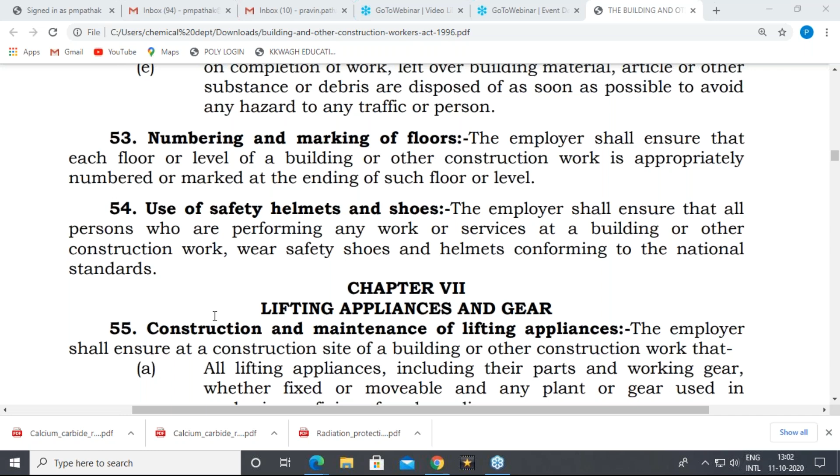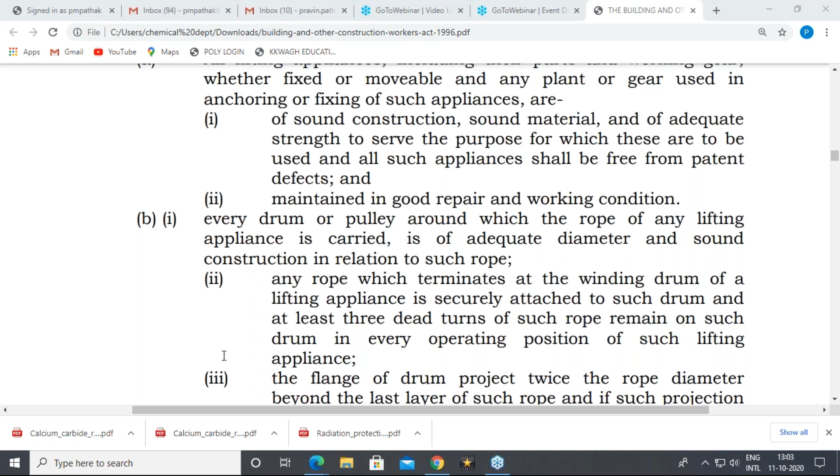So chapter 7 gives you the idea regarding lifting appliances and gear. Rule 55 covers construction and maintenance of lifting appliances. We have already discussed lifting of material, lifting of objects, and lifting of building workers. All these lifting activities are done with lifting appliances, and the maintenance of these lifting appliances must be done regularly. Whatever the parts of the lifting appliance, be it a drum, a pulley, a gear mechanism, a fencing facility, or a guarding facility, all these things should be taken care of by the employer.

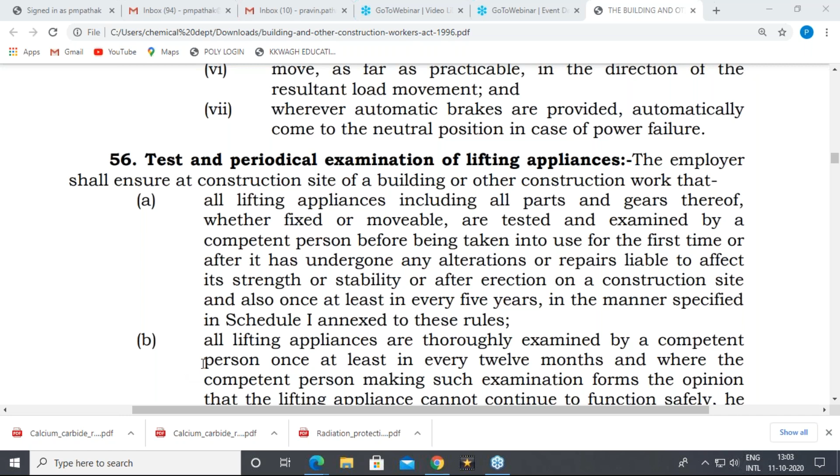Then 56 is regarding the test and periodical examination of lifting appliances. All these lifting appliances should be tested on a regular basis and examined periodically, and generally a competent person in this field should test and examine or inspect these lifting appliances every year, and the main test or examination should be done at least every 5 years.

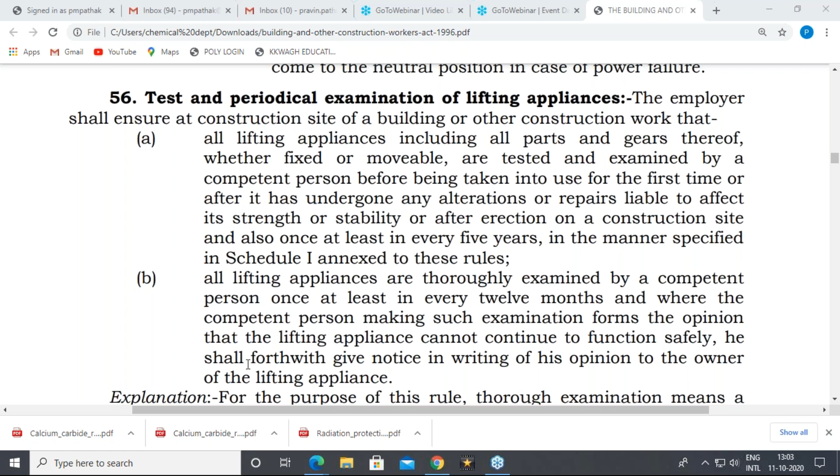Then automatic safe load indicators should also be mounted on these appliances at the construction site, because safe working load is the main parameter from which you can understand whether these appliances and equipment are conducting all the activities in a safe mode or not. So the automatic safe load indicator should be mounted on the mounting accessories, on the equipment, or on the control panel of that equipment.

Then installations: the employer shall ensure at a construction site of building or other construction work that fixed lifting appliances are installed by a competent person in a manner where the load is calculated, vibration is minimized, and other influences are minimized, so that the operator is not exposed to danger from loads, ropes, or drums, and so that the operator can either see over the zone of operation or communicate with all loading and unloading points by signal or other communication systems.

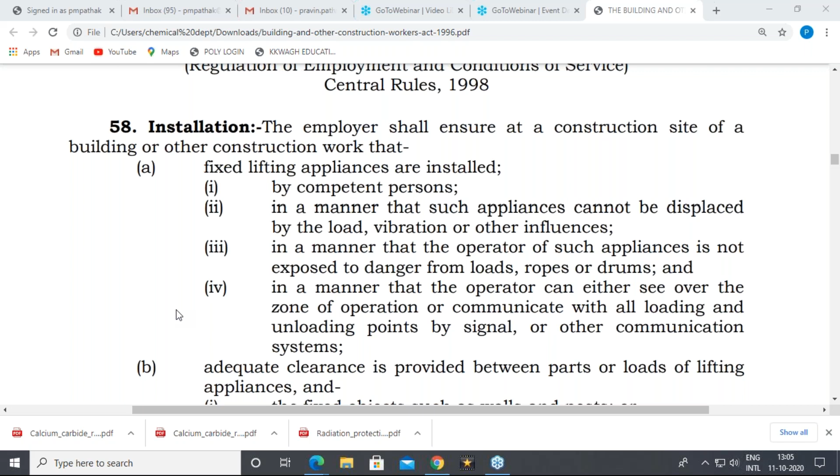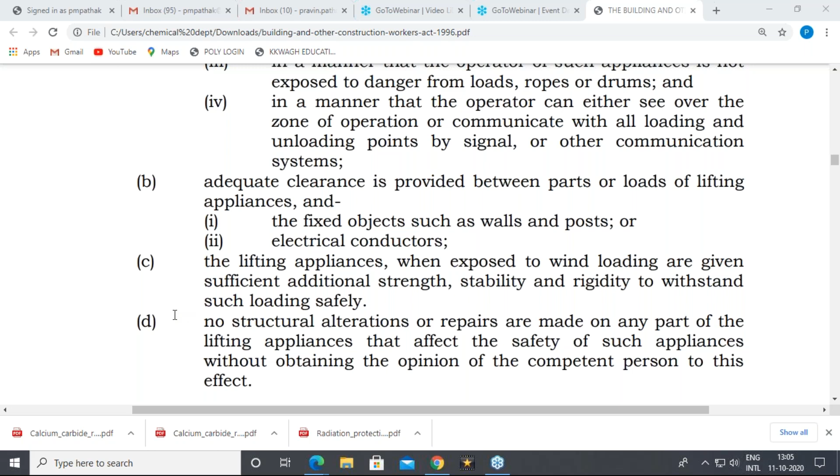So with the help of these reference points and guidelines, this installation should be done. There should be adequate clearance between these parts and loads and different appliances. Lifting appliances exposed to wind loading are given sufficient additional strength, stability, and rigidity to withstand such loading safely.

Then 59 is related to winches. The employer shall ensure at a construction site of building or other construction work that winches are not used if control levers operate with excessive friction or play. So if there is excessive friction, we have to avoid using these winches in construction activities. Double gear winches are not used unless a positive means of locking the gear shift is provided. There is no load other than the fall and the hook assembly on the winch.

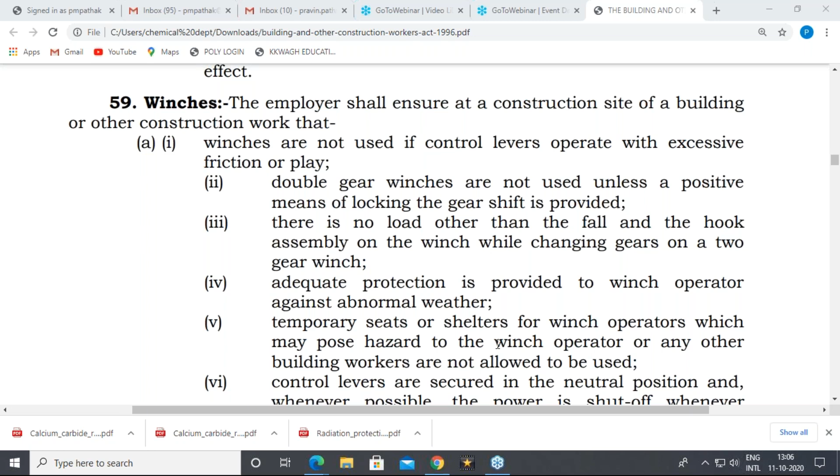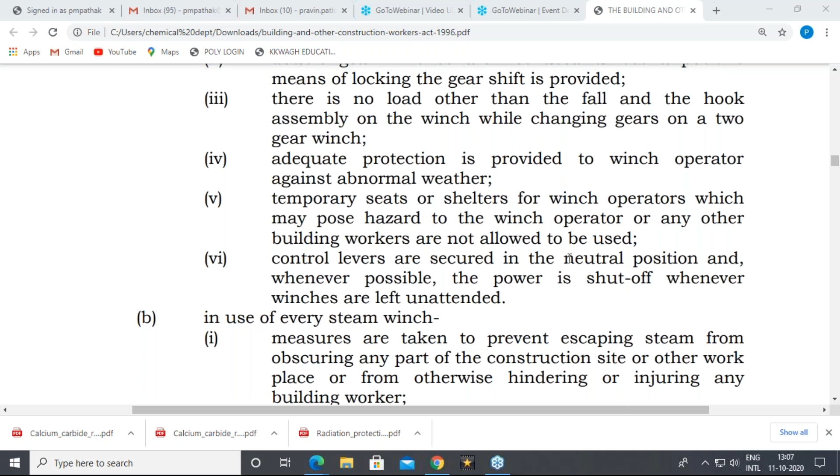While changing gears on a 2-gear winch, adequate protection is provided to the winch operator against abnormal weather; temporary seats or shelters for operators which may pose a hazard to the winch operator or other building workers are not allowed to be used. Control levers are secured in the neutral position and, whenever possible, the power is shut off whenever winches are left unattended. So take note: if you are not going to operate these winches, you have to shut off the winches whenever there is no requirement for operation.

In use of every steam winch, measures are taken to prevent escaping steam from obscuring any part of the construction site. Extension control levers which tend to fall of their own weight are counterbalanced. Winch operators are not permitted to use winch control extension levers except for short handles, and such levers are of adequate strength, secured and fastened with metal connections. So all these things should be noted: the connections, the strength of the winches, the lever, the arms, the connection with the metal strips or the fixed installation, etc.

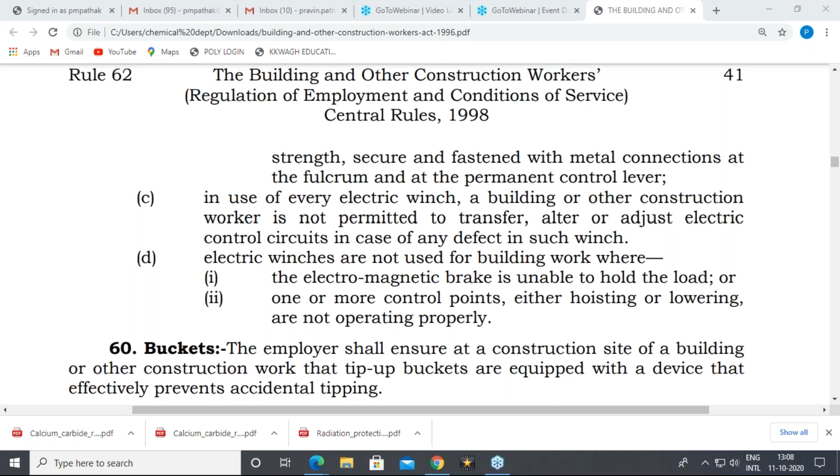So all this care should be taken by the winch operator, whether the winch is operated on the electrical basis or on the steam basis.

Then for buckets, the employer shall ensure at the construction site of a building or other construction work that tip-up buckets are equipped with a device that effectively prevents accidental tipping, so as to prevent the building worker from different types of accidents which may happen due to bucket movement.

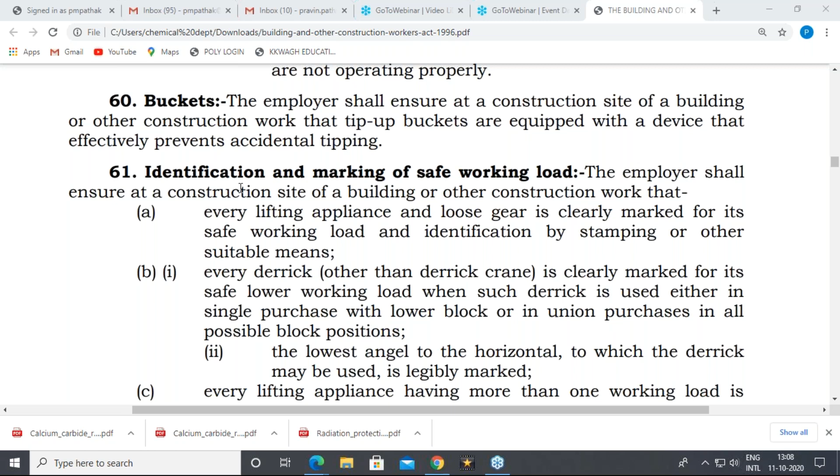Then identification and marking of safe working load should be done at the construction site wherever applicable.

Then loading of lifting appliances and lifting gears. All the guidelines given by the expert or competent person for handling these types of lifting appliances and gears should be followed by the building worker. That is the main key to prevent this type of accident.

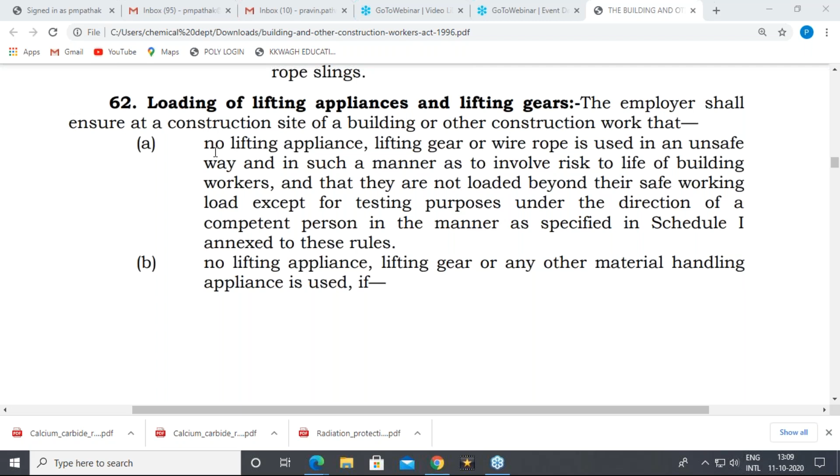Then the operator should observe and recall all the types of testing of the appliances and gear mechanism, and the examinations and certifications required. The inspector will take care of all these types of testing, examinations, and certifications, but the operator should also know which type of testing and which BIS standards or other standards are required for using these appliances and their mechanism.

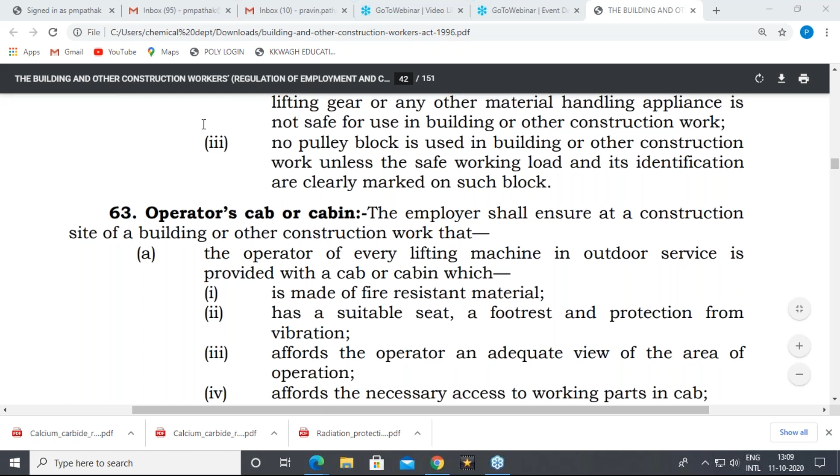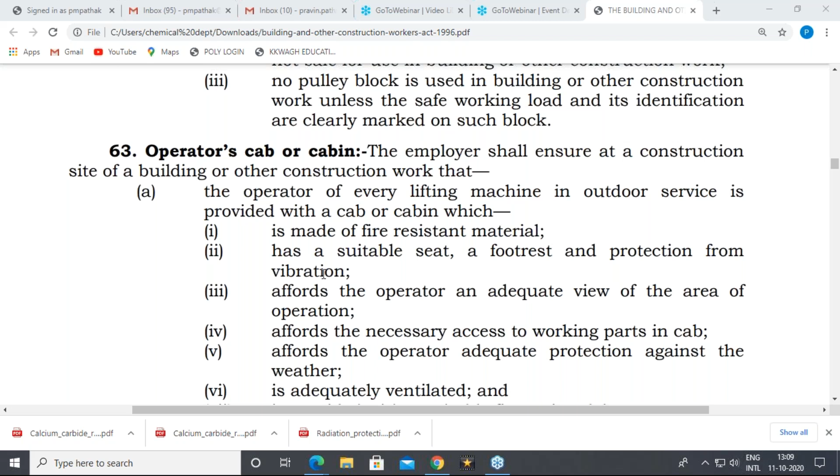Then, point related to the operator's cab or cabin: the operator of every lifting machine in outdoor service is provided with a cab or cabin made of fire resistant material, having a suitable seat, a footrest, and protection from vibration. It affords the operator an adequate view of the area of operation, which is essential, allows necessary access to working parts in the cab, gives adequate protection against weather, is adequately ventilated, and is provided with a suitable fire extinguisher. So fire extinguisher, fire resistant material, adequate ventilation, light systems, etc., all should be provided in the cabin or operator's cab.

Then operation of lifting appliances should be guided by the competent person, and all operators should go through different types of training where their skills can be tested and upgraded, to prevent any type of accident these trainings are essential.

So 18 plus years is the criteria for using these types of appliances or scaffolding. A trained operator should observe initially when a new operator joins and starts handling these types of lifting appliances.

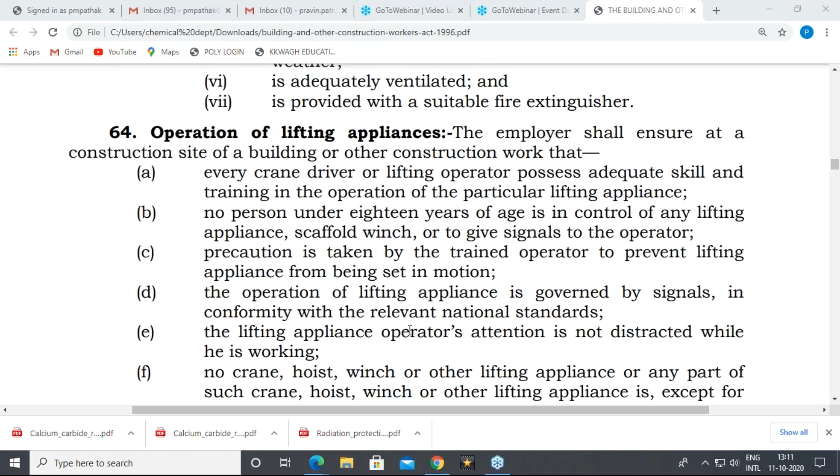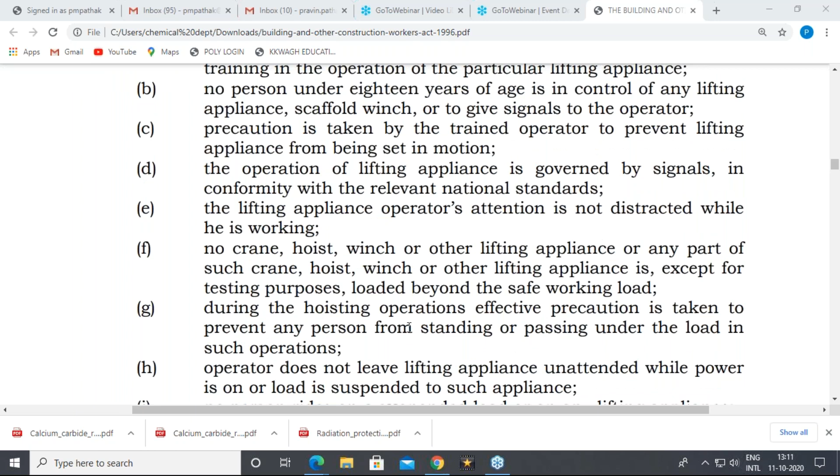The operator's attention should not be distracted while working. That is why equipment like mobile phones should also be avoided while operating these types of appliances.

No crane, hoist, winch, or other lifting appliance, or any part of such, is loaded beyond the safe working load except for testing purposes. So you should know exactly what the safe working load of that lifting appliance is.

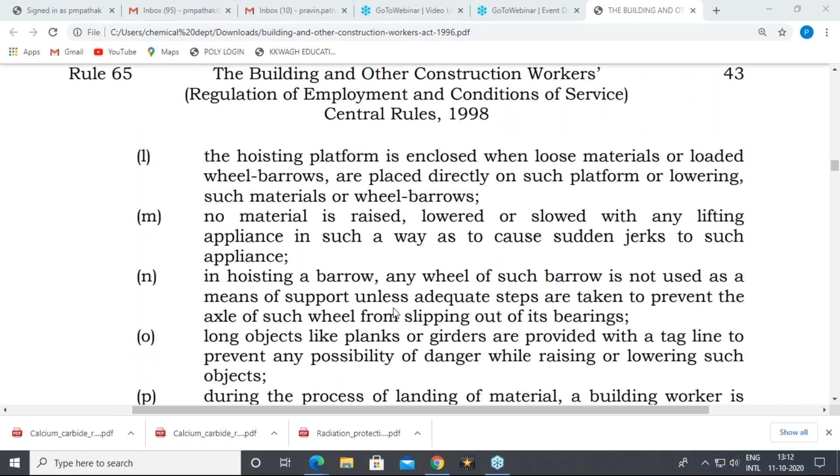So all precautionary measures should be taken by the operators who are operating these types of lifting appliances. There may be a platform raised, lowered, or slowed with a lifting appliance, and that may cause sudden jerks, which should be avoided.

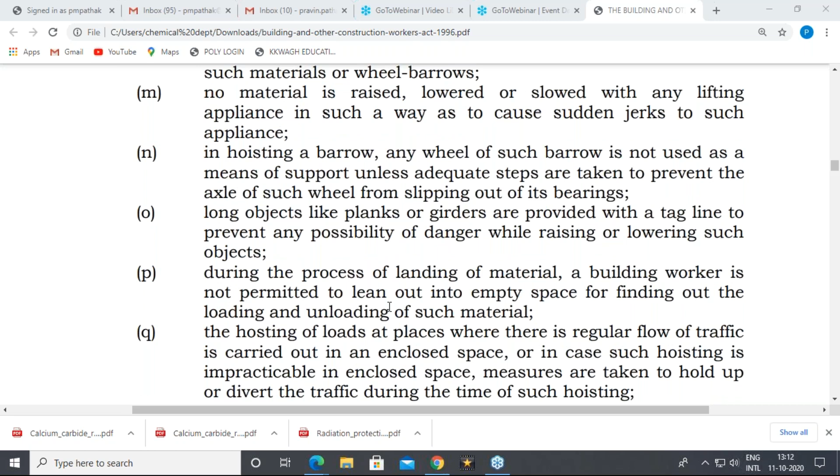Then, for hoisting a barrow, any wheel of such barrow is not used as a means of support unless adequate steps are taken to prevent the axle of such wheel from slipping out of its bearings.

So long objects like planks or girders are provided with a tagline to prevent any possibility of danger while raising or lowering such objects, because these objects are very heavy. Due to this, there are chances of fatalities and severe injury to the head, which is why these precautionary measures should be taken at the construction site.

Then, hoist: the employer shall ensure at a construction site that hoist towers are designed according to the relevant national standards.

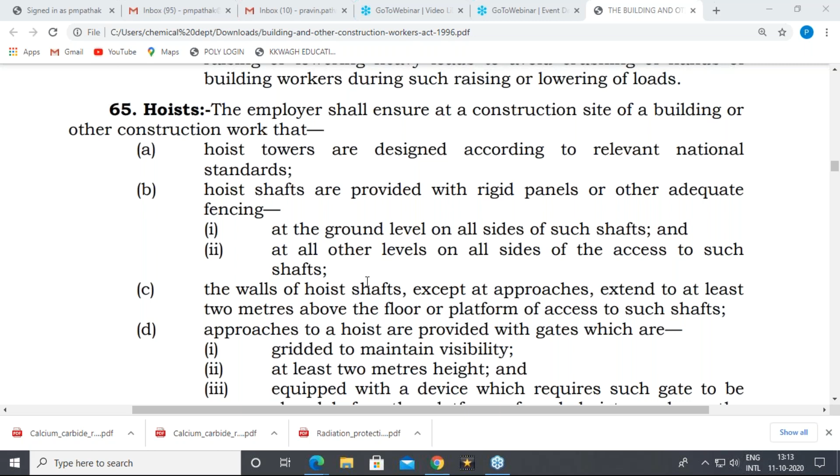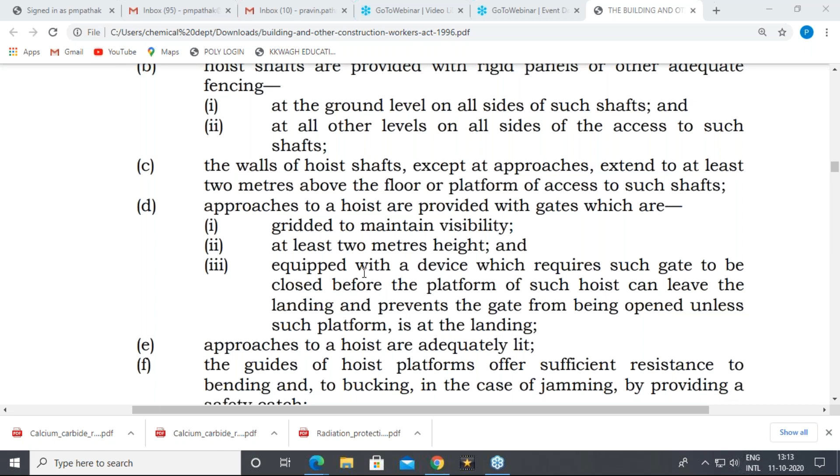Hoist shafts are provided with rigid panels or adequate fencing. The walls of hoist shafts, except at approaches, extend to at least 2 meters above the floor or platform of access to such shafts. Approaches to a hoist are provided with gates which are gridded to maintain visibility, at least 2 meters in height, equipped with a device which requires such gates to be closed before the platform of the hoist can leave the landing, and which prevents the gate from being opened unless the platform is at the landing. So gates should be provided with proper control, equipped with the hoist, and at least 2 meters is the main criteria for handling these types of hoists.

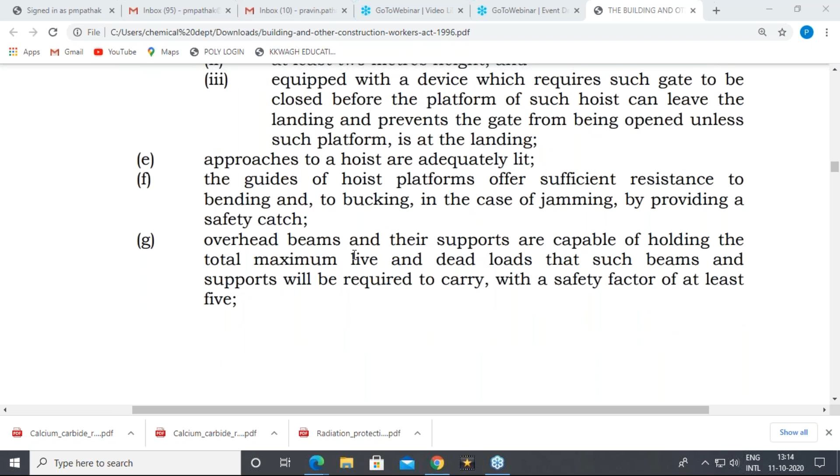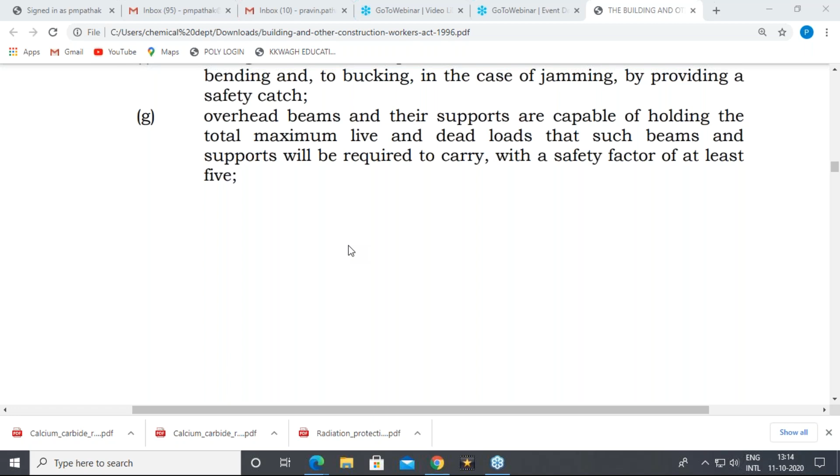The platform should be strengthened to remain strong in case of jamming, by providing safety catches, and guides are provided for this hoist platform. Overhead beams and supports are capable of holding the total maximum live and dead loads, such beams and supports being required to carry a safety factor of at least 5, and a clear space is provided for moving, stopping, and all other activities done by this hoist.

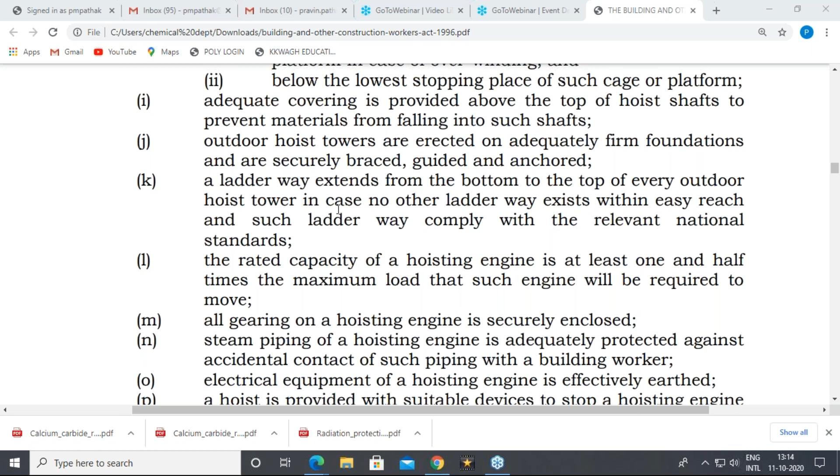So the ladder way extends from the bottom to the top. Every outdoor hoist tower, in case no other ladder way exists within easy reach, such ladder way should comply with the relevant national standards. So all these platforms, safety work operations, and controls should be decided by complying with the relevant national standards.

So all these guidelines are given in these sub rules for the hoist operations.

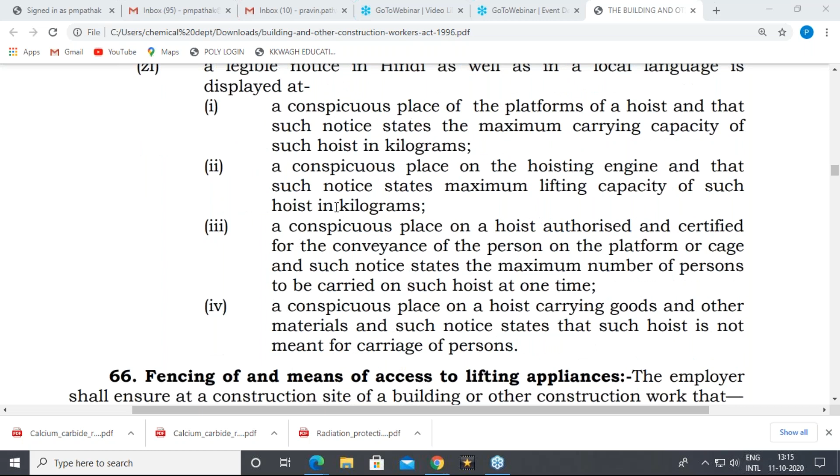Then fencing of and means of access to the lifting appliances. We have already discussed the parts of the lifting appliances, that may be a pulley, a gear mechanism, or a revolving part. So all these parts should be fenced to avoid accidents.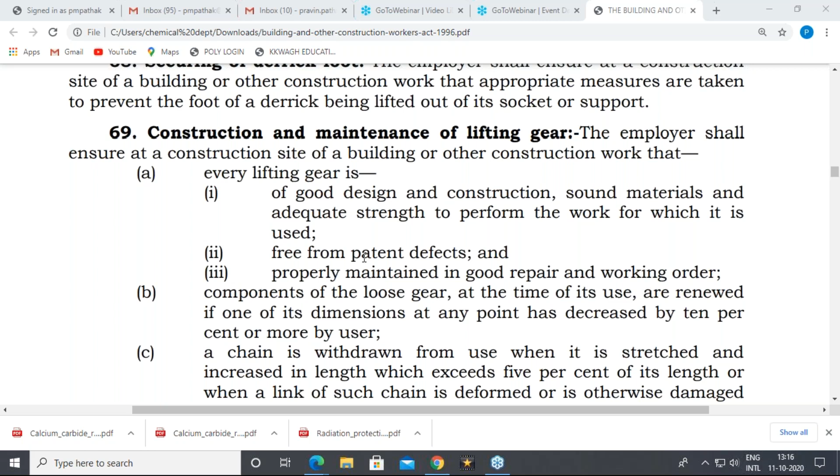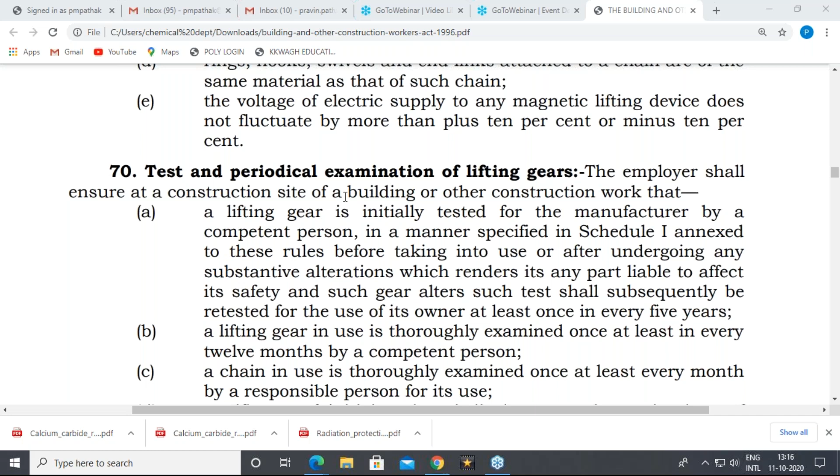Then rule 68 is regarding the securing of derrick foot, and rule 69 regarding the construction and maintenance of lifting gear. We have already discussed that lifting gear mechanisms and lifting appliances should be taken care of by the competent person, the inspector, and the operator for regular maintenance and repairing. Testing and periodical examination of this lifting gear should be done by the competent person, who will check the lifting gear mechanism every 12 months as a minimum criteria.

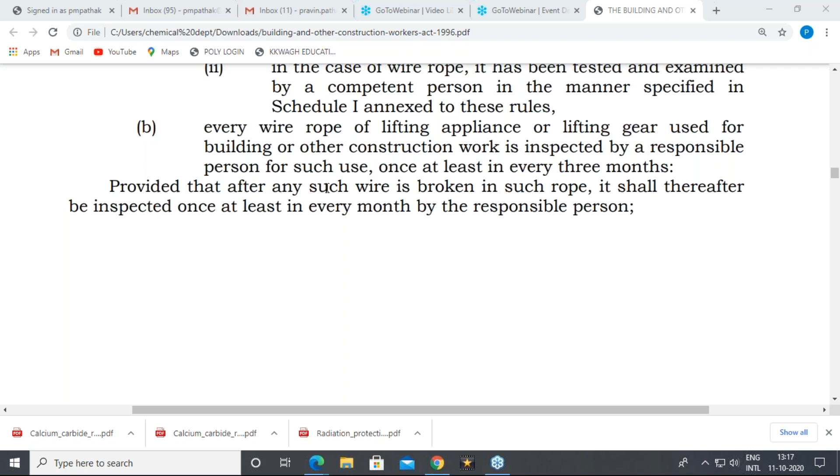Then rule 71 is related to ropes. No rope is used for building or other construction work unless it is of good quality and free from patent defects. In the case of wire rope, it must have been tested and examined by the competent person with reference to Schedule 1 annexed to these rules. So every wire rope of a lifting appliance or lifting gear used for building or other construction work is inspected by a responsible person every 3 months. All these ropes should be tested or examined by an expert person.

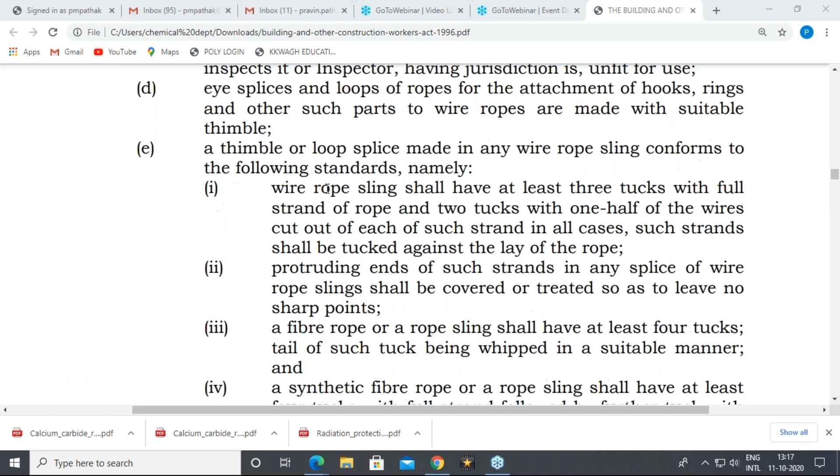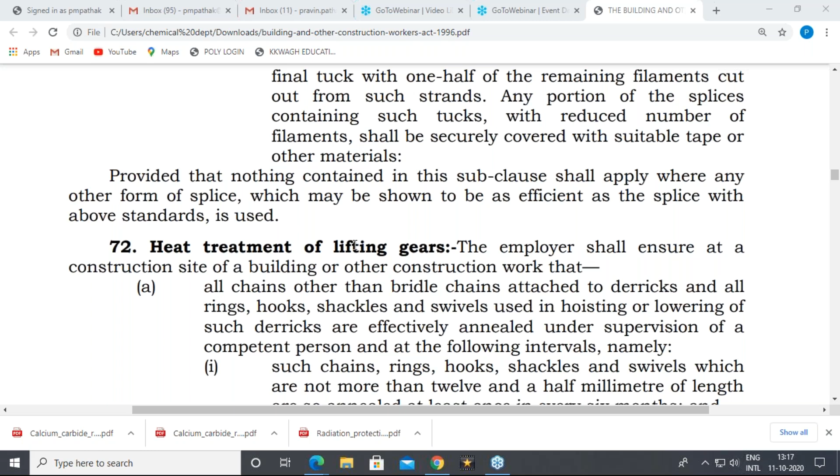So all the guidelines while selecting these types of ropes are given, like for fiber rope, rope sling, synthetic fibers, etc. There are different varieties of ropes available in the market, and before selecting these types of rope, we must study the actual operational procedures. So to avoid accidents, we must go for the appropriate rope.

Then rule 72 is related to the heat treatment of lifting gears. These lifting gears require some heat treatment for better strength and better resistance for handling different types of activities at the site.

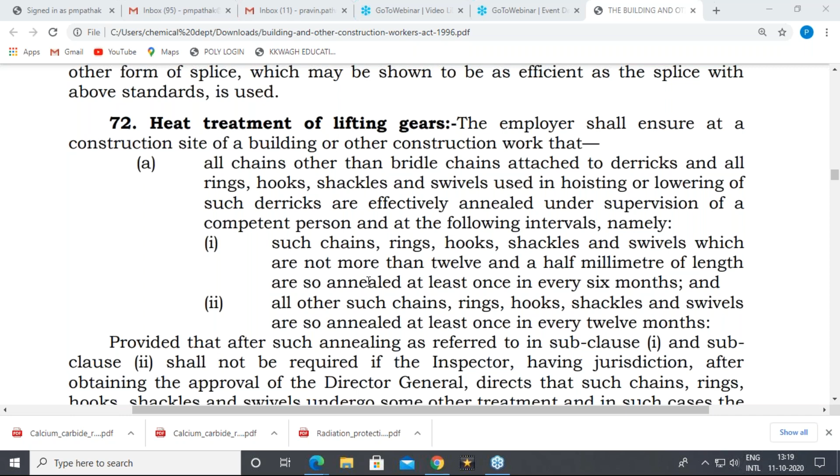So the competent person will supervise these different parts, that may be rings, hooks, shackles, swivels, hoisting parts, etc. Supervision of the competent person applies for such chains, rings, hooks, shackles and swivels which are not more than 12.5 millimeters in size, annealed at least once every 6 months. Annealing is one of the heat treatment processes required for these types of parts - chains, rings, hooks, shackles, etc. - once every 6 months for this criteria. All other such chains, rings, hooks, shackles and swivels are annealed at least once every 12 months. So depending on the size, the annealing process or heat treatment process required differs.

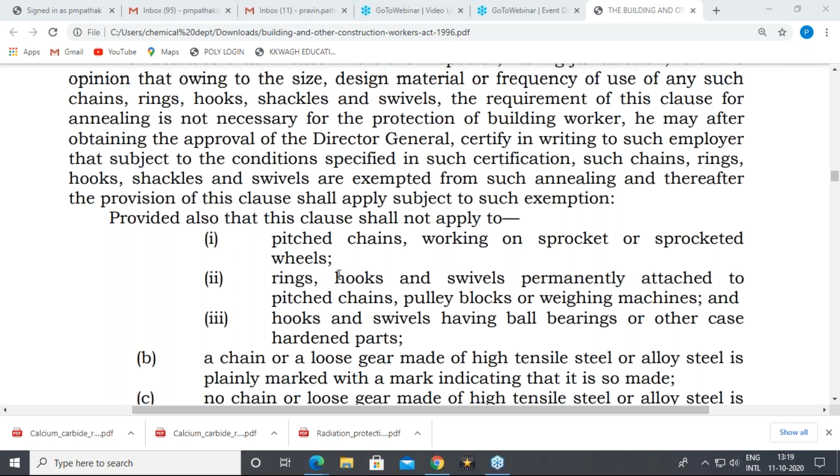There are different guidelines for the heat treatment, given by the Director General, inspectors, and competent persons for different parts of these appliances.

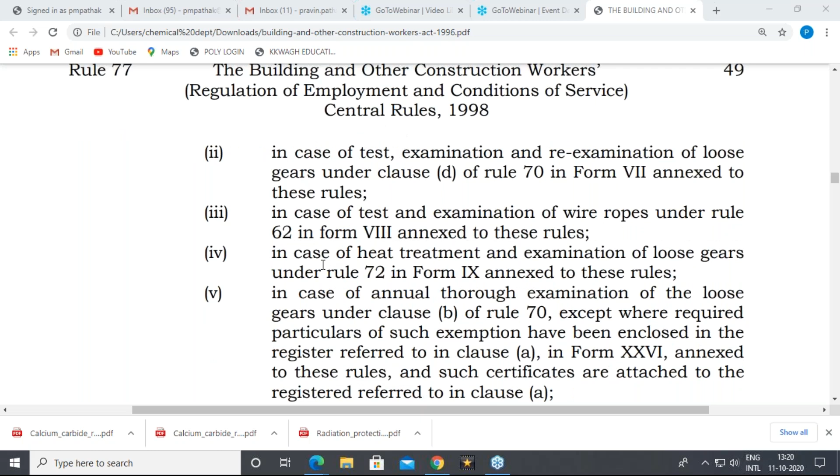Then there is a certificate process to be issued after actual testing and examination by the competent person, mentioned under rule number 73. Then the register of periodical tests, examinations and certificates, or the record keeping of this certification, is mentioned under rule number 74. So whatever requirements are given under the above rules, in the different forms or schedules, all this should be recorded in that register.

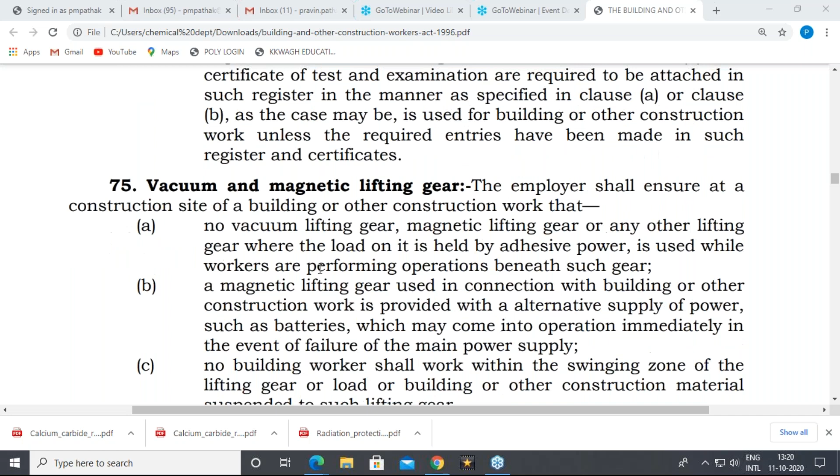Then rule number 75 is related to vacuum and magnetic lifting gear. The employer shall ensure that no vacuum lifting gear, magnetic lifting gear, or any other lifting gear where the load is held by adhesive power, is used while workers are performing operations beneath such gear. A magnetic lifting gear used in connection with building or other construction work is provided with an alternative supply of power.

So it is an alternative supply of power, such as batteries, which may come into operation immediately in the event of failure of the main power. So it is an additional arrangement - magnetic power can be used when the main power fails.

Rule 76 is related to the knotting of chains and wire ropes. The guidelines state that no chain or wire rope with a knot in it is used in building and other construction works. So it is restricted that knotting of chains and wire ropes should be avoided.

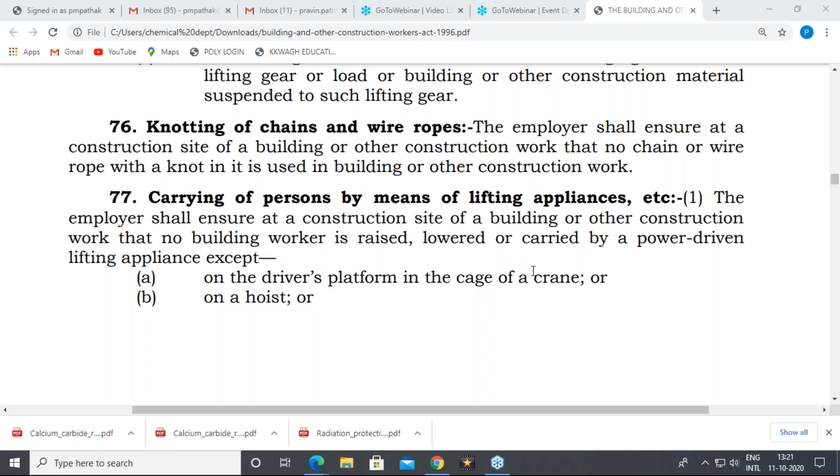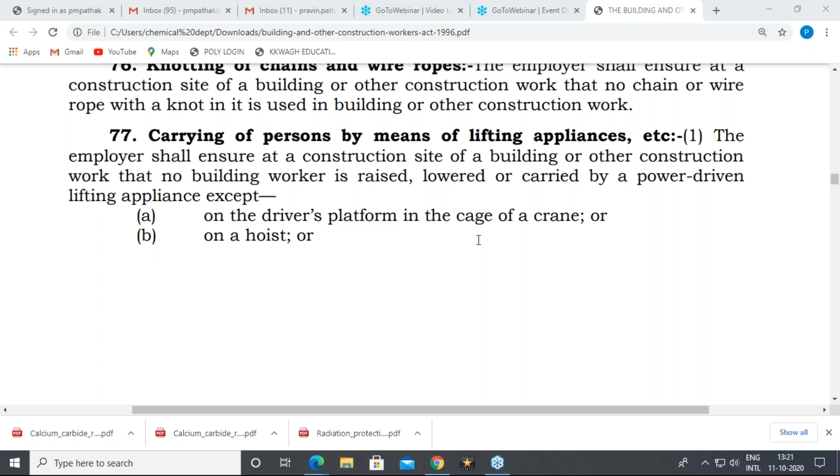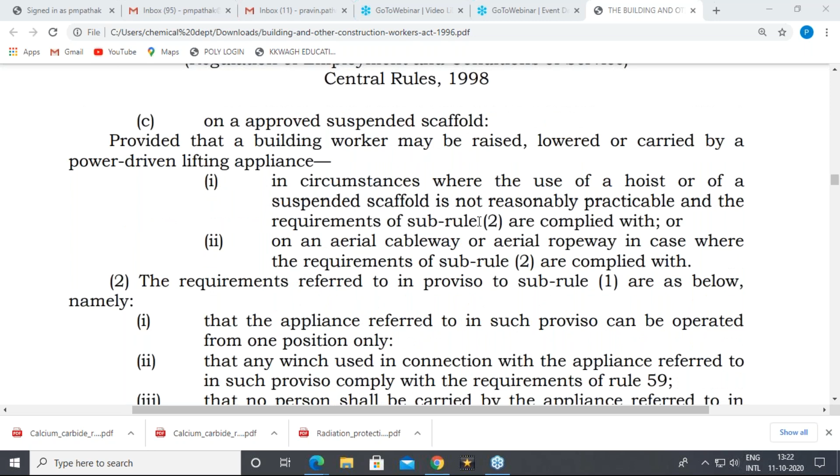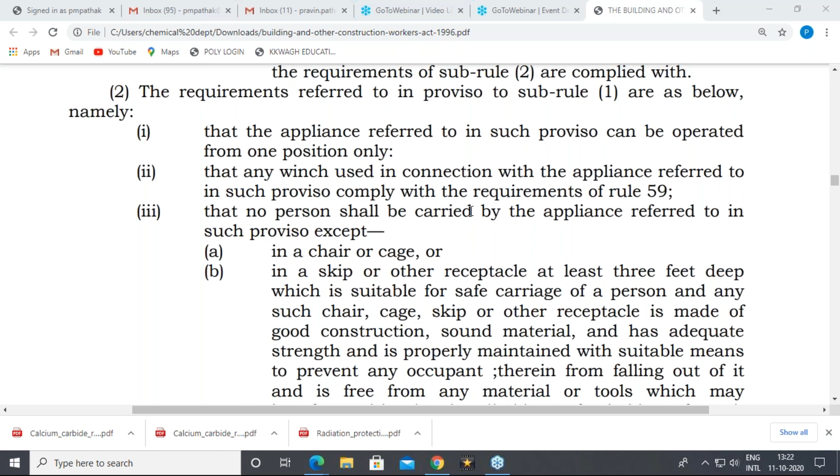Rule 77 is related to the carrying of persons by means of lifting appliances. We have already discussed that lifting appliances can be used to lift objects, materials, and persons. This is related to persons now. Power driven lifting appliances can be used for this purpose, except on the driver's platform, in the cage of a crane, on a hoist, or on an approved suspended scaffold. These can be used to lift persons depending on the capacity of the lifting appliances and the height at which persons are carried. There should be arrangements for ventilation, lighting, and chair or cage arrangements, etc.

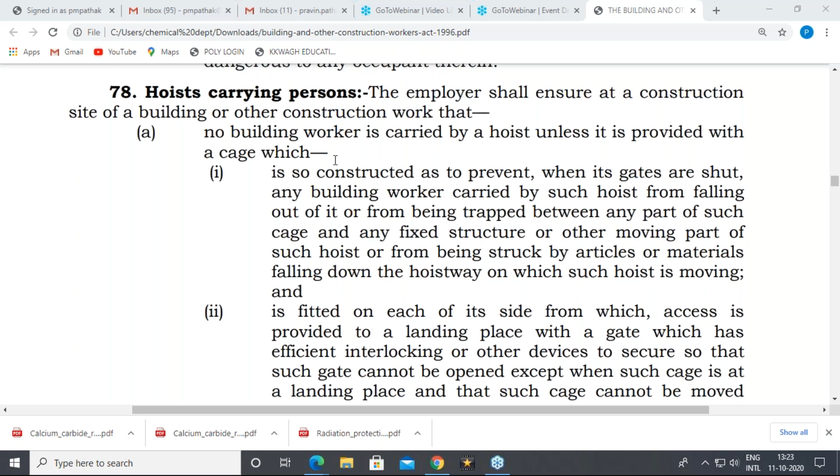Rule 78 is related to hoists carrying persons. The employer shall ensure this facility at the site. No building worker is carried by a hoist unless it is provided with a cage. Normally, lifting appliances are used to carry persons. In case of an emergency or exceptional situation, hoists are used to carry persons, but the condition is that a cage must be provided to that hoist, and only then can these persons be carried.

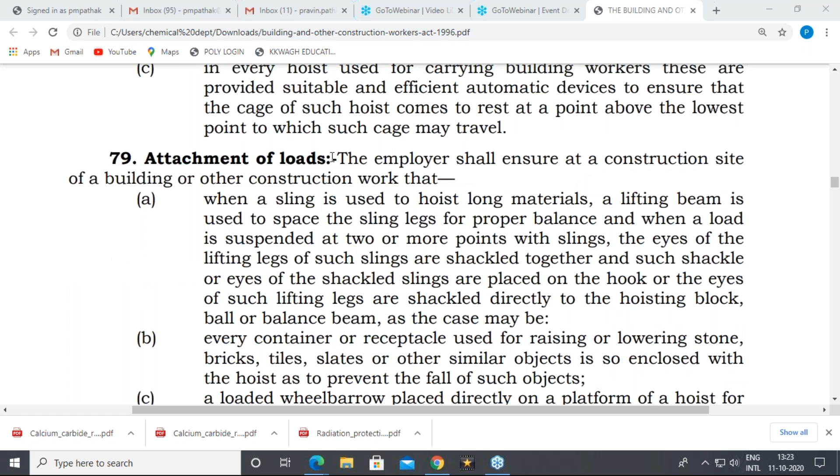Rule 79 is related to the attachment of loads. We have already discussed lifting appliances for carrying materials. We have to check the safe load factor, the lifting capacity, and the conditions of the slings or ropes used for lifting materials, whether tests and examinations are carried out and up to date, whether certificates are available for these tests and examinations, and whether competent persons have tested, examined, or inspected all these parts of attachments, whether rope, sling, or other parts.

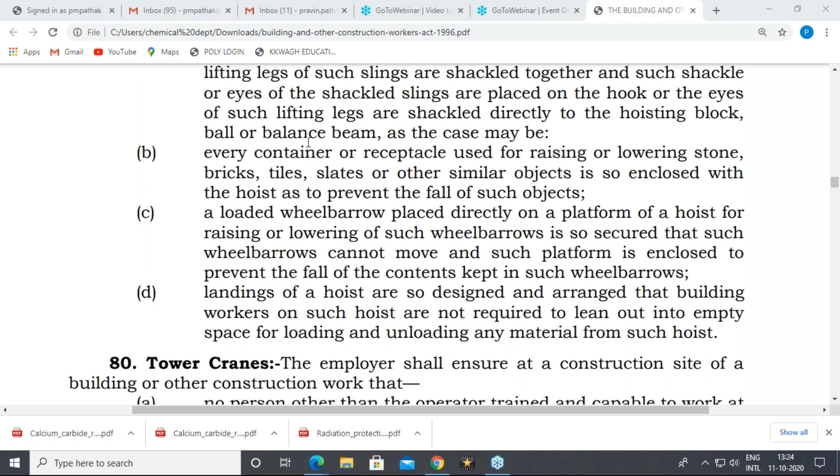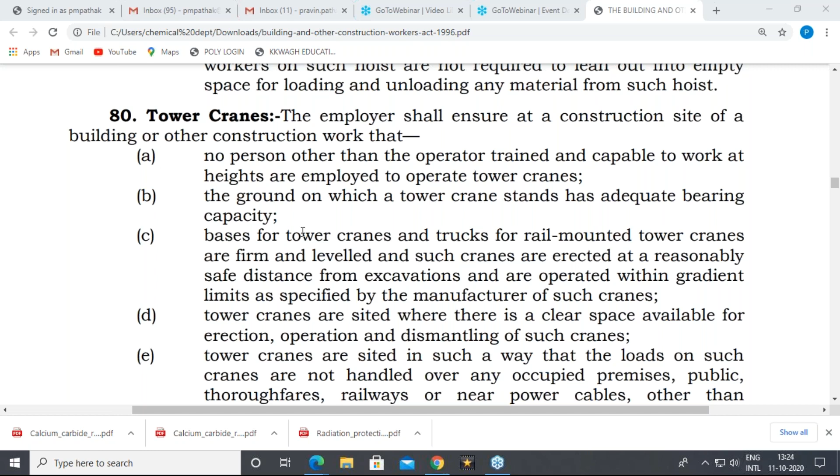Rule 80 is related to tower cranes. No person other than an operator trained and capable to work at heights is employed to operate tower cranes. These tower cranes require separate training for operation, which is why only trained persons are involved. Some standards are followed for deciding the capacity of the tower crane, the base plate, the base mechanism, the strength of the base, and the carrying capacity, all of which should be tested and examined by a competent person.

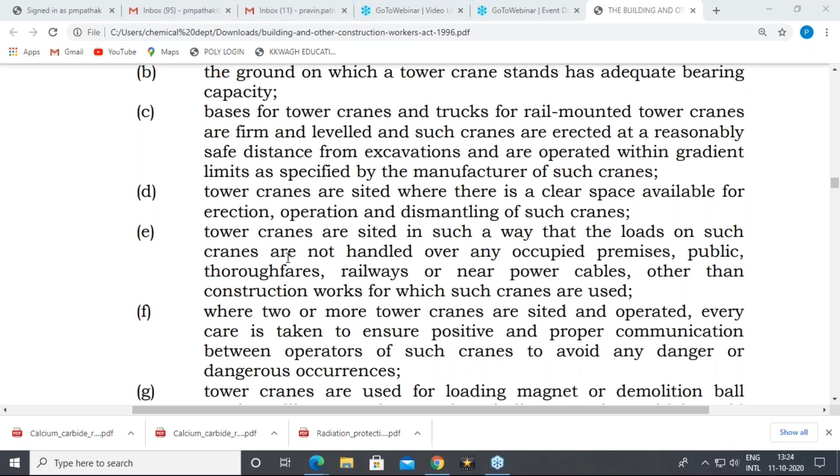Rule 81 is related to the qualification of operators of lifting winches and of signalers. For lifting winches and signaling, the operator's qualification requires being above 18 years of age, sufficiently competent and reliable, possessing knowledge of the inherent risks involved in operating lifting appliances, and being medically examined periodically as specified in Schedule 7 annexed to these rules. We have to read Schedule 7 for the details of these operator qualifications.

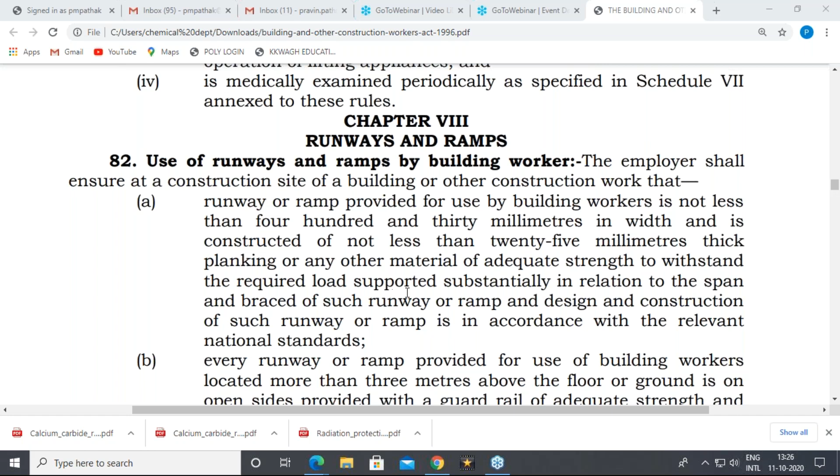Chapter 8 focuses on runways and ramps. Rule 82 is related to the use of runways and ramps by building workers. In emergency planning or an emergency action plan, due to natural calamities or similar conditions, runways and ramps can be designed for moving building workers from one place to another. For this purpose, the thickness, width, and material of construction of these runways and ramps, as well as the safe load factor, should all be taken care of while designing them.

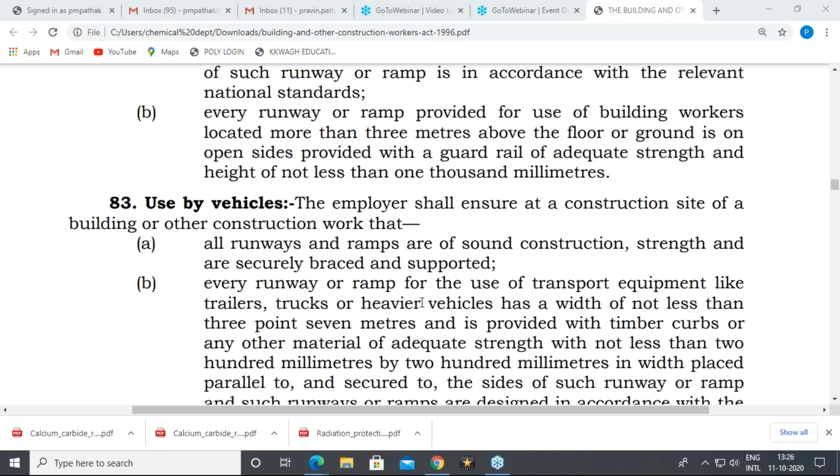Rule 83 is related to use by vehicles. All runways and ramps are of sound construction and strength, and securely braced and supported. Every runway or ramp for use by transport equipment like trailers, trucks, or heavier vehicles must have a width of not less than 3.7 meters, and must be provided with timber curbs or other material of adequate strength, not less than 200 millimeters by 200 millimeters in width, placed parallel to and secured to the sides of such runway or ramp. This provides a transportation facility so vehicles can move from one place to another with the help of these strong runways and ramps.

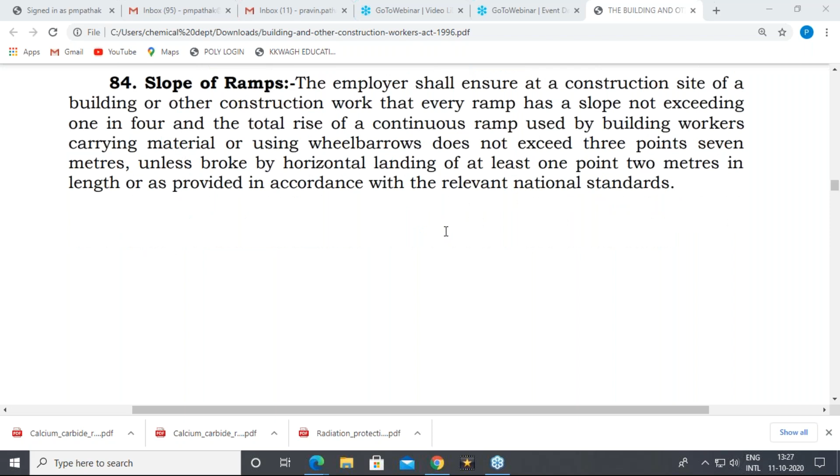There is also a condition that the slope of ramps should be as provided and mentioned by the competent person only. Rule 85 is related to the use by wheelbarrows.

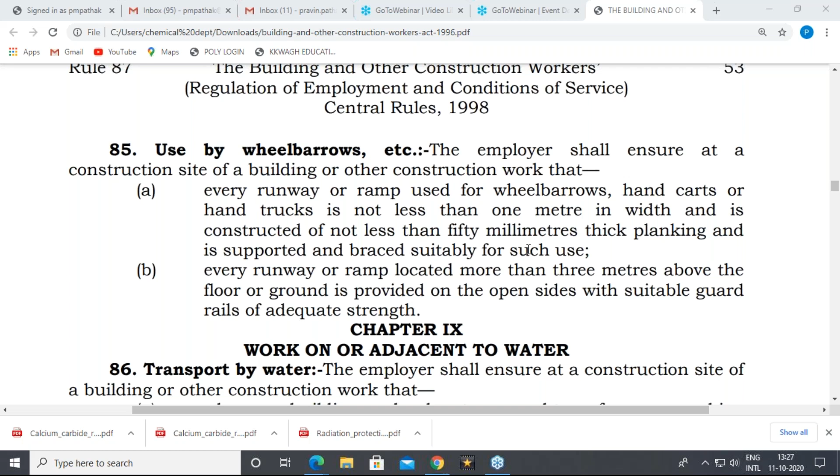Chapter 9 focuses on work on or adjacent to water. When construction activities are going on near water bodies or water sources, the precautions to be taken are mentioned under this chapter. Transport by water is one such activity near water. When any building worker has to proceed to or from any workplace by water for the purpose of carrying on building or other construction work, proper measures must be taken while transporting through this water.

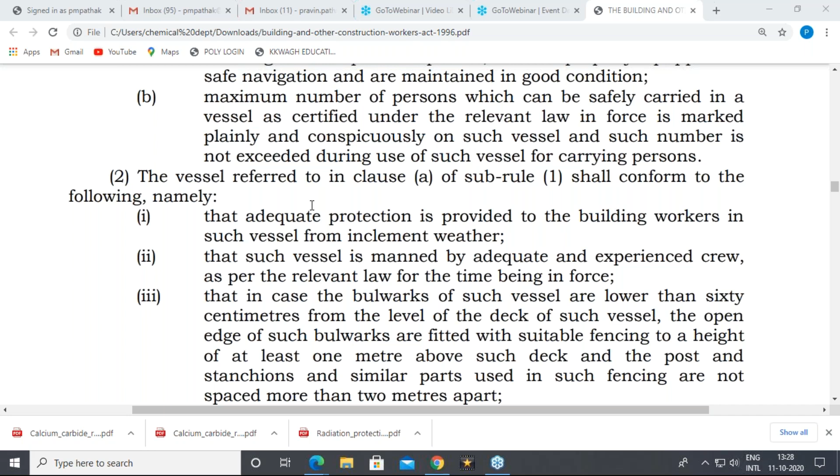So the maximum number of persons which can be safely carried should be identified, and only these number of persons should be allowed to go through the water with the transport facility. The vessel referred in the clause mainly ensures that adequate protection is provided for these vessels.

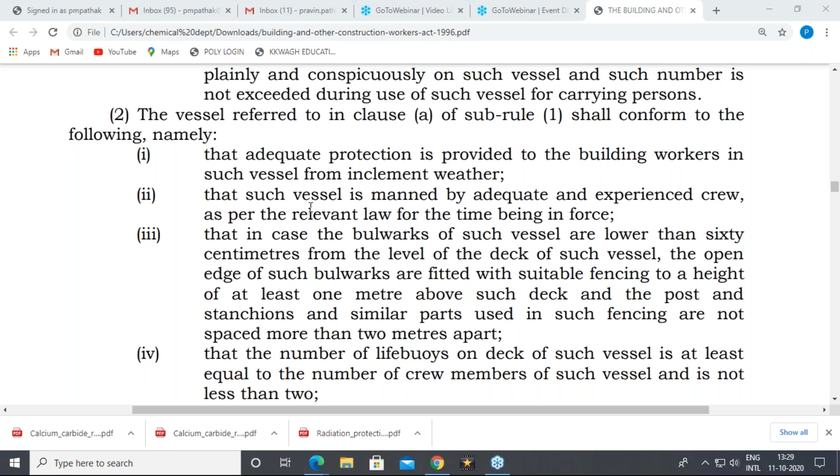Such vessels are manned by adequate and experienced crew as per the relevant law. In case the bulwarks of such vessels are lower than 60 centimeters from the level of the deck of such vessel, the open edge of such bulwarks are fitted with suitable fencing.

So we have to take care about this fencing, and the different dimensions mentioned in these rules. Also, the number of life buoys on deck of such vessel should be at least equal to the number of crew members, so that is not less than 2.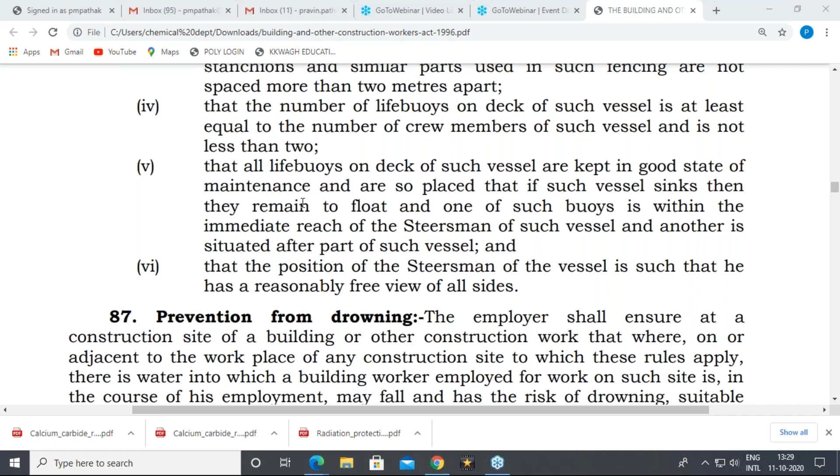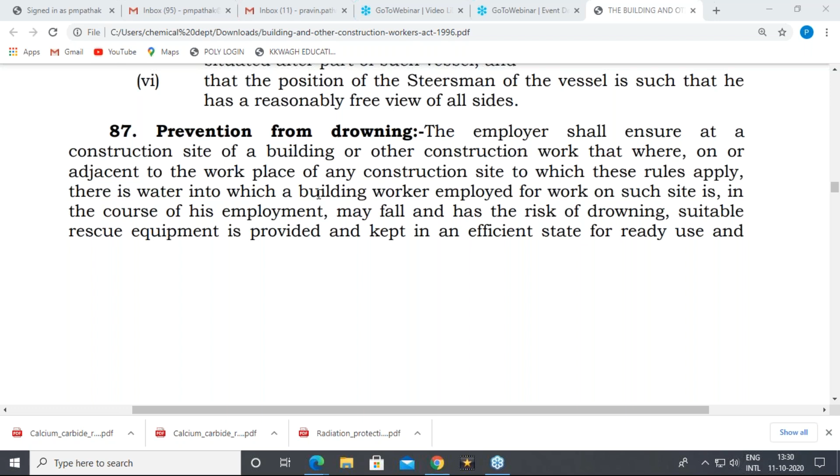Then rule 87 is related to prevention from drowning. Drowning is one of the main risks when construction activities are near water. To prevent these types of accidents, we have to take care by providing suitable rescue equipment in or nearby that construction activity.

Then chapter 10 focuses on transport and earth moving equipments. We have already discussed in detail about these earth moving equipments, their hazards, and their safety or precautionary measures in one of the sessions on construction activity equipments. Rule number 88 is related to earth moving equipment and vehicles, which we have already discussed.

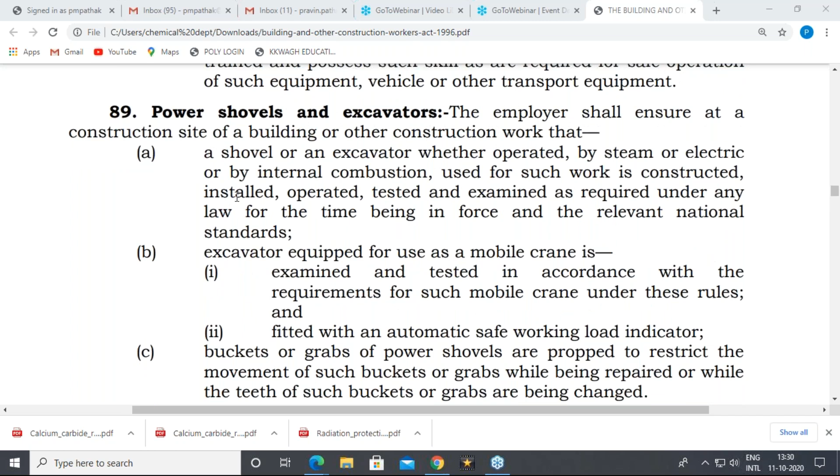Then power shovels and excavators are different equipments used in excavation work. Then bulldozers, their operating conditions and precautionary measures; scrapers, their operating conditions and safety measures; mobile asphalt layers and finishers. Especially you have to take care about this heated asphalt, that is hydrocarbon.

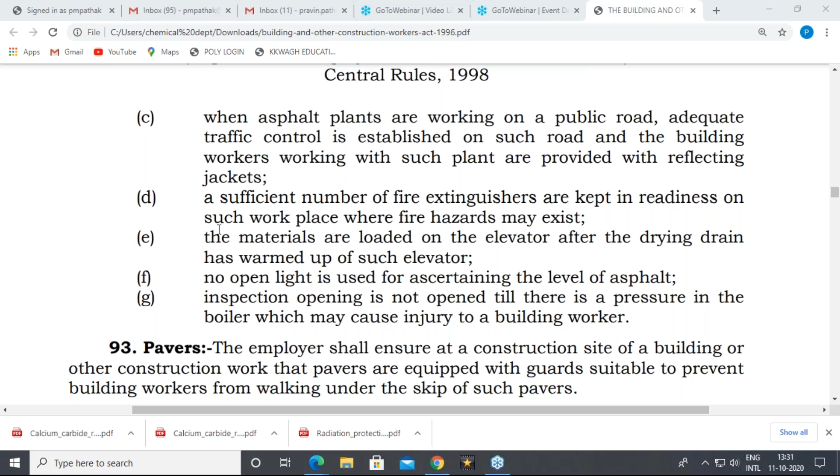That may be a dangerous chemical when you are going to handle it at higher temperature, and that is why gum boots, hand gloves, helmets, goggles, etc. should be provided while handling these types of chemicals.

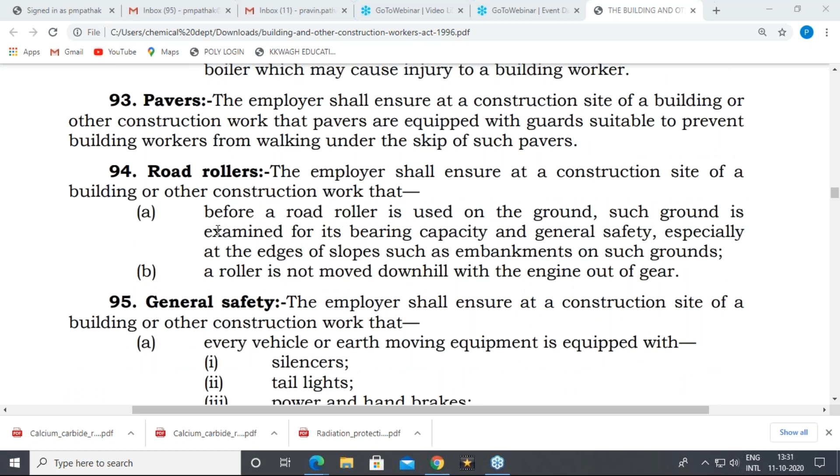Then pavers, road rollers, and rule number 95 is regarding general safety. Every vehicle or earth moving equipment is equipped with silencers, tail lights, power and hand brakes, reversing alarms, and searchlights for forward and backward movement, which are equipped for safe operation of such vehicles or earth moving equipments.

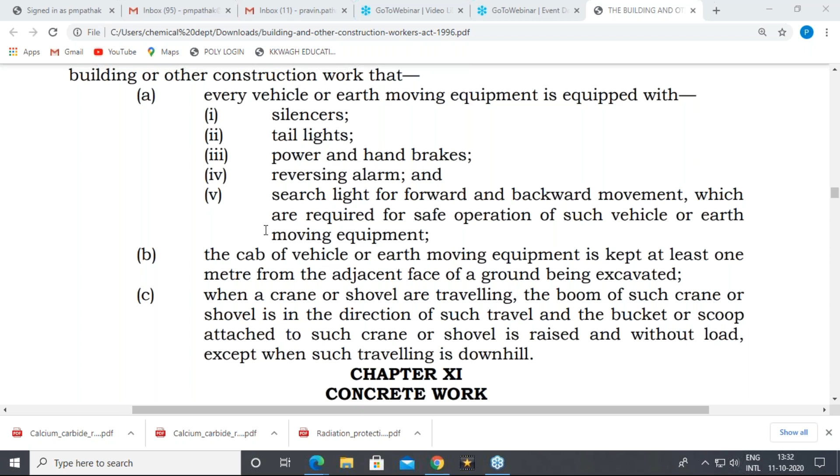So all these are the simple guidelines for each and every type of earth moving equipment. A cab with all the provisions like lighting, ventilation, etc. should be provided for doing the activities when we are handling the earth moving equipments or excavator equipments.

Then chapter 11 focuses on concrete work. Since we are talking about construction activity, this concrete work is also important. Rule number 96 is related to the general provisions regarding the use of concrete.

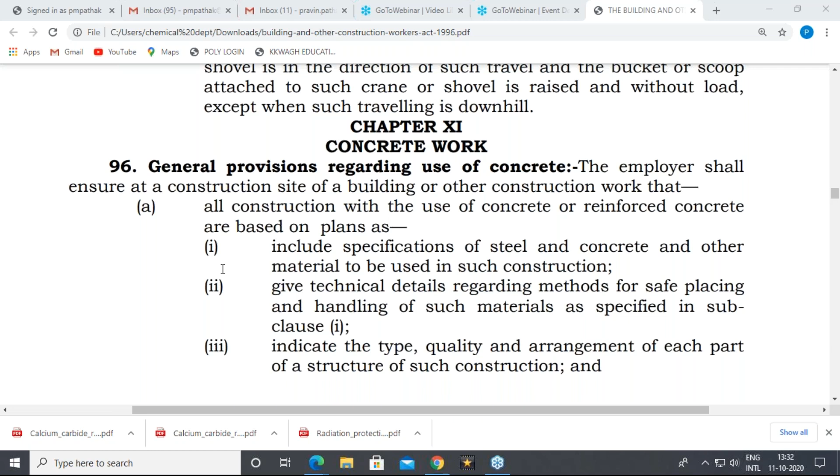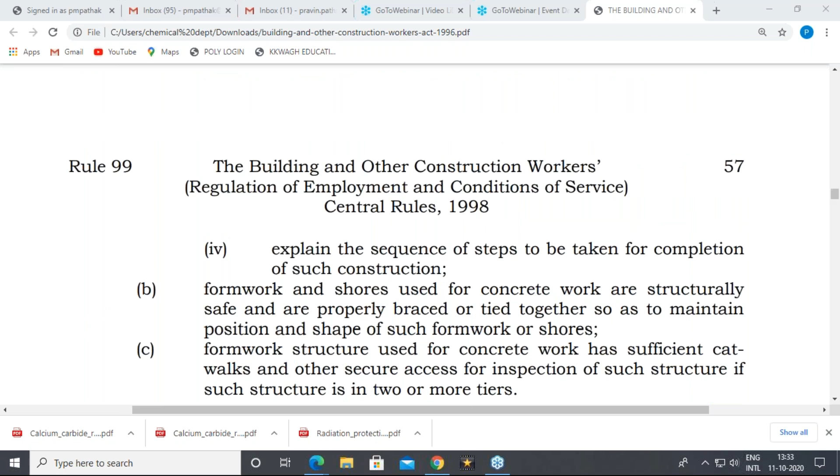So all construction with the use of concrete or reinforced concrete should be based on plans that include specifications of steel, concrete and other materials to be used in such construction; give technical details regarding the methods for safe placing and handling of such materials; indicate the type, quality and arrangement of each part of the structure of such construction; and explain the sequence of steps to be taken for completion of such constructions. We have to follow the standard procedures or standard sequence while handling these types of concrete or reinforced concrete.

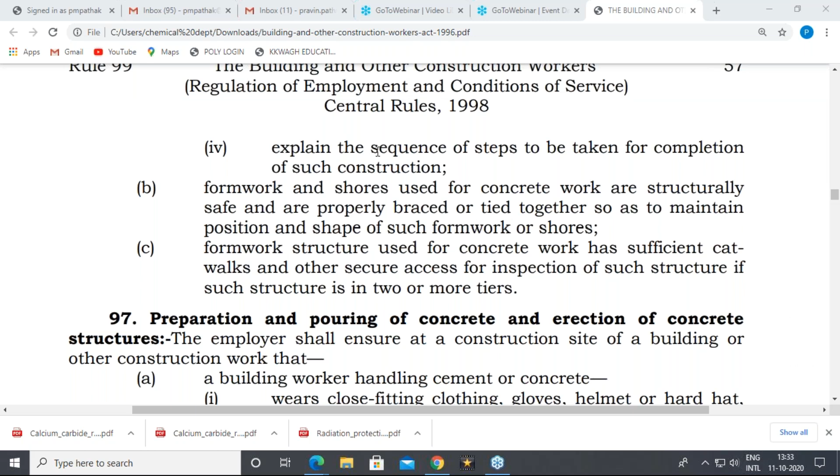Then rule number 97 is related to the preparation and pouring of this concrete and erection of concrete structures. While doing these activities, while pouring this concrete or erecting structures,

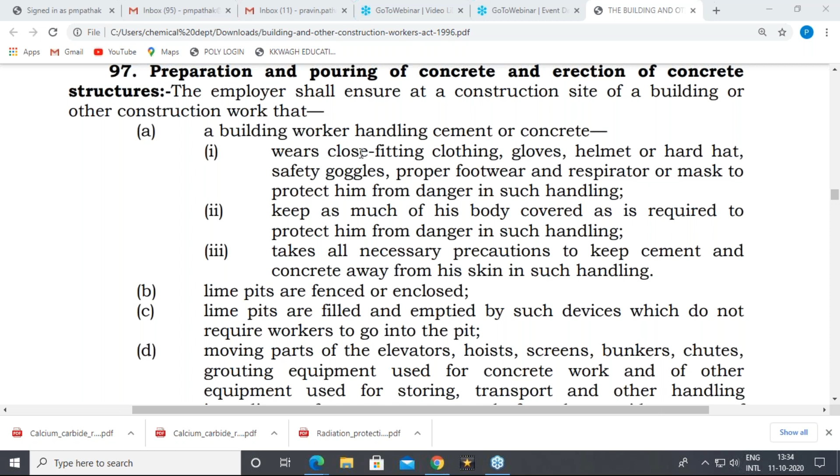we must use gloves, clothing, helmets, hard hats, safety goggles, proper footwear, and a respirator or mask to protect from the danger in such handling of these concretes. Keep as much of the body covered as is required to protect from the danger in such handling.

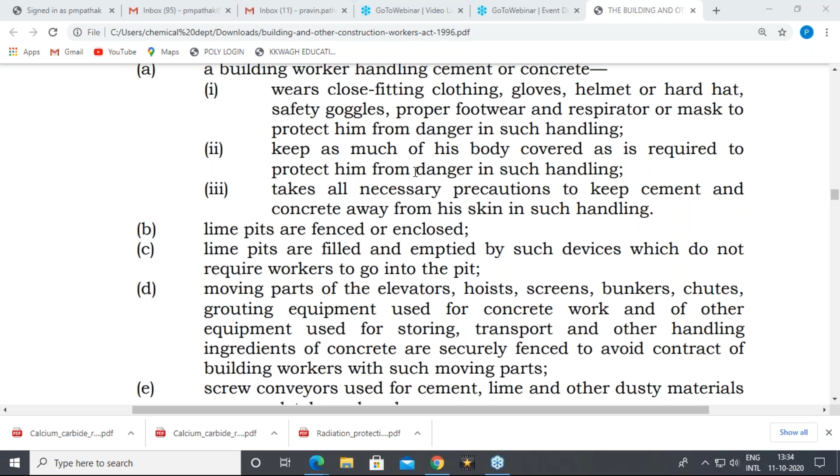So all the facilities or personal protective equipment should be provided to all the building workers while handling these types of concretes or other chemicals.

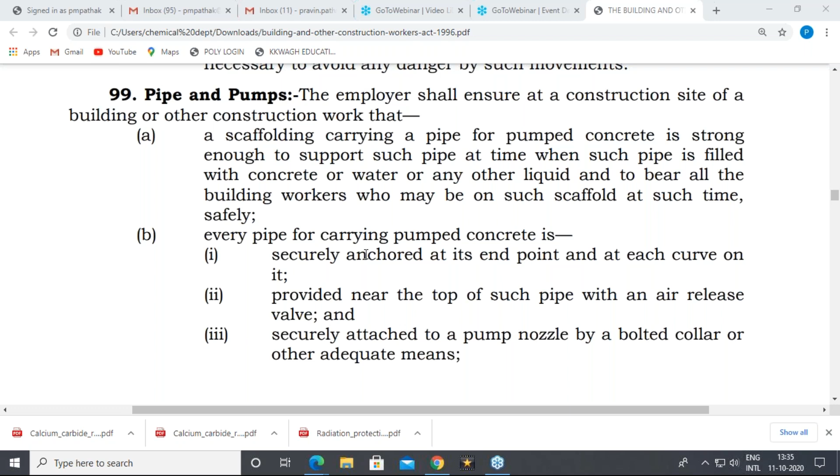Then rule number 99 is related to pipes and pumps. Some pipes carry the concrete, called semi-solid concrete, and it is driven by pumps. So all the safety measures should be taken while handling these types of concrete through these pipes and pumps. Sometimes